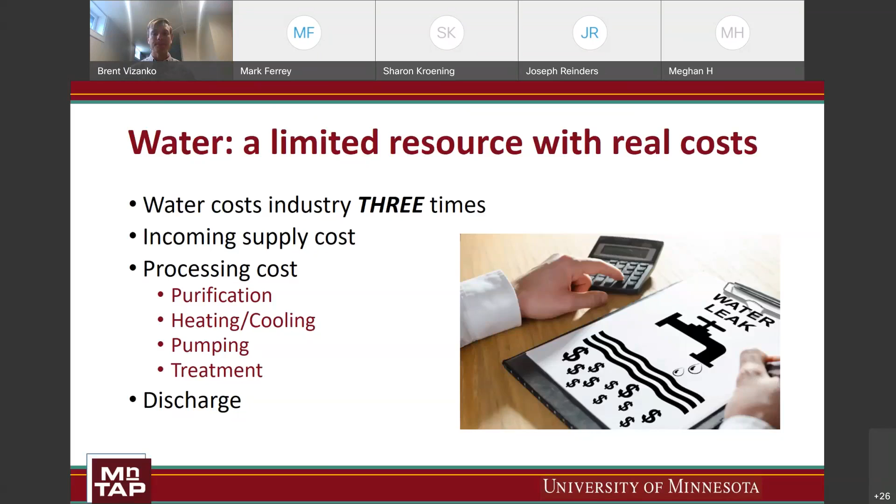Now that we know the cost of water, the next step would be to find where water is being used. Here are a couple examples - we'll go through a couple slides of examples of where we typically find water use in these industries.

First would be washing and rinsing - pots and pans here on the left, to pressure washing in the middle. We see a lot of these things around, hoses are pretty common just to wash things off and rinse things out. The photo on the right is a rinse tank, so lots of water being used there.

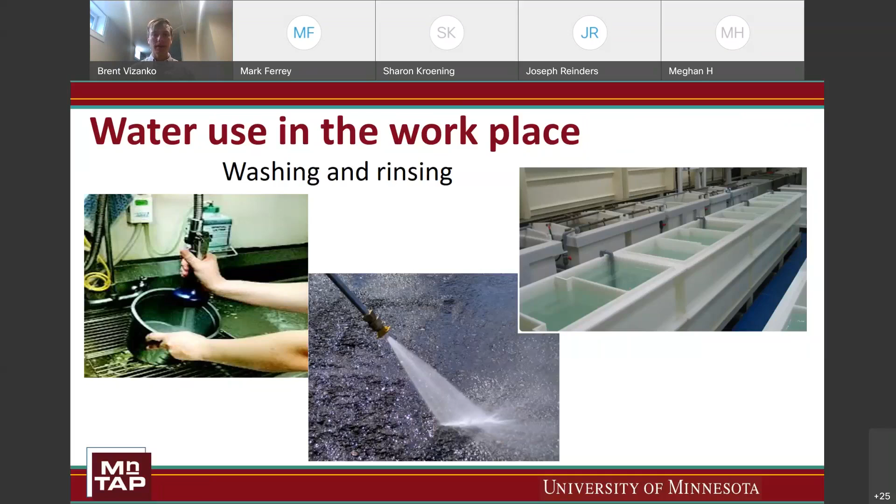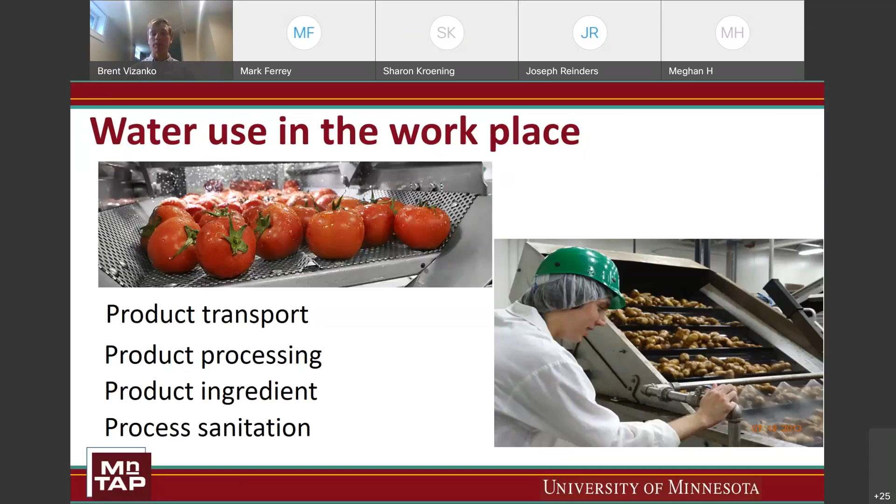These next ones are a little more specific to the food industry, but we see a lot of food facilities use water for transporting product, processing the product, as an actual ingredient in whatever they're producing. And the fourth one, sanitation, is typically a pretty big one with a pretty good opportunity usually for conservation.

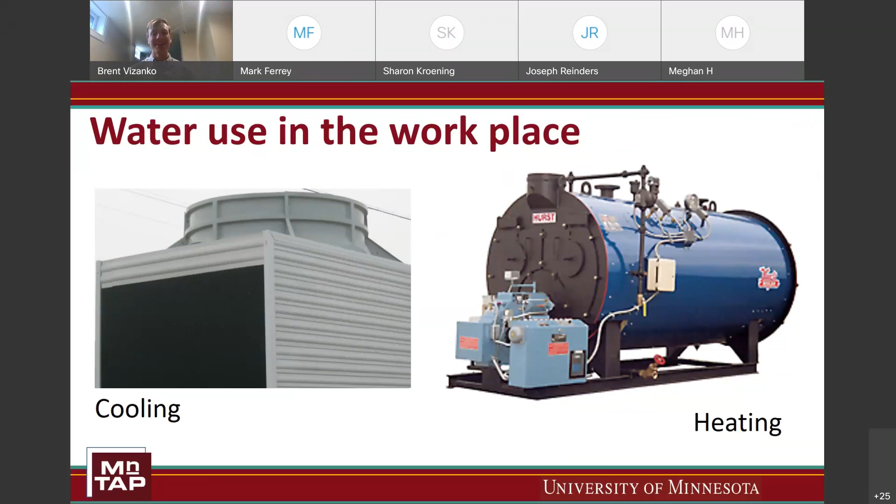The next place we usually find water would be cooling and heating. The picture on the left is a cooling tower used for cooling loops, and for heating you think of steam - steam is just water, so we find some water use there as well.

The next one is water treatment and purification. This on the right is a reverse osmosis skid. Typically water purification treatment has some sort of reject water, so that's what we're looking for when it comes to these types of processes.

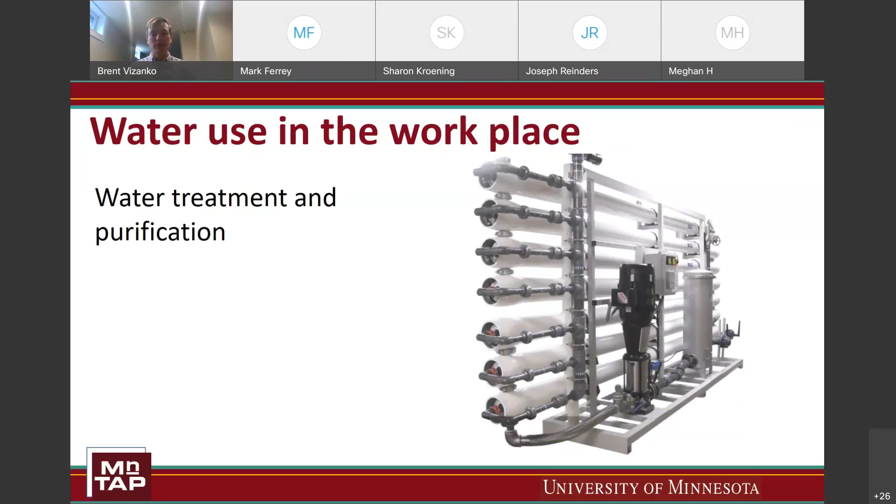Finally, landscape irrigation or domestic uses - not the typical industrial water use, but something we do see often is irrigation of land and turf, and then domestic uses like toilets, sinks, and showers.

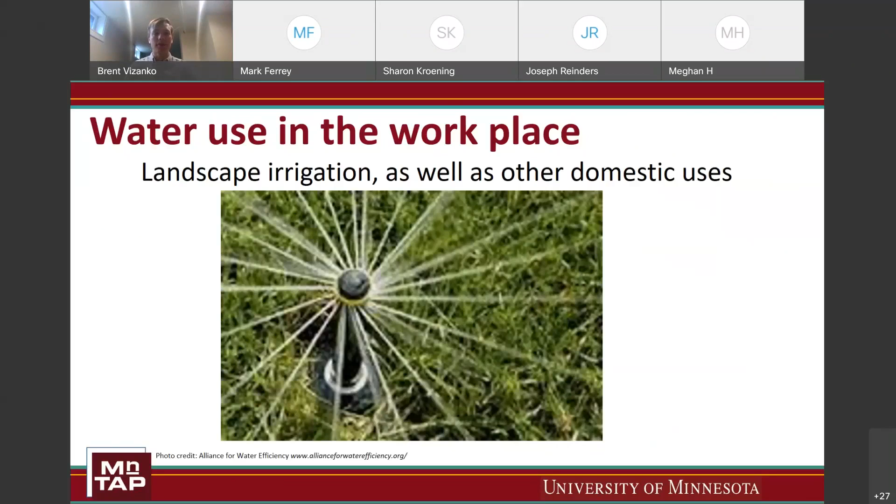All right, so now we're going to talk a little bit about how MnTAP characterizes the opportunities we seek out at these facilities. For a long time with water assistance, we were trying to think of a way to sum up how we can provide a variety of recommendations to facilities. What we came up with was a 4-part strategy, the 4 M's, if you will.

Those are map, maintain, manage, and modify. Mapping, that first stage, can really be independent of the other three. This is usually a very important step before getting to recommendations that fall under those following three categories. However, we might actually make some recommendations to a facility that help them map the water a bit better, so that they can sustain implementing these recommendations as they move forward and find new opportunities. That mapping stage is really crucial to get a picture of what your opportunities are.

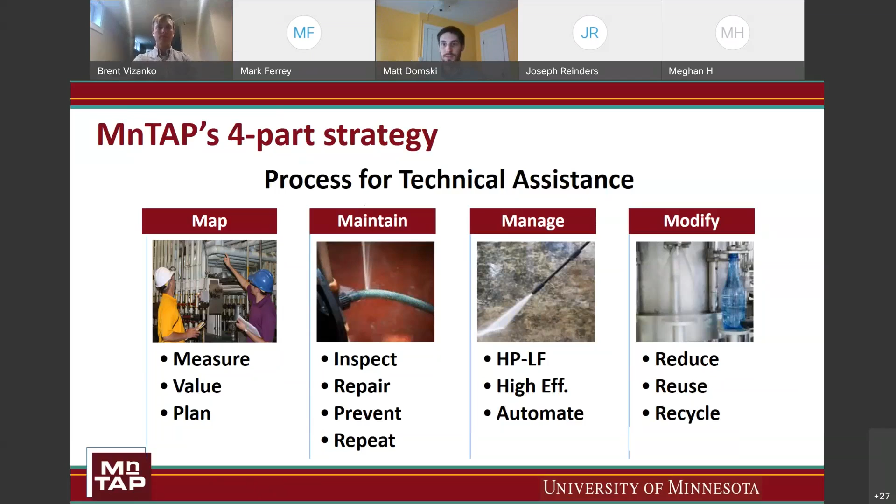So we will revisit this slide once more, and I'll give you a little more summary and context as to the importance of having this variety. But we'll get into some examples of how these come into play when we're out visiting facilities.

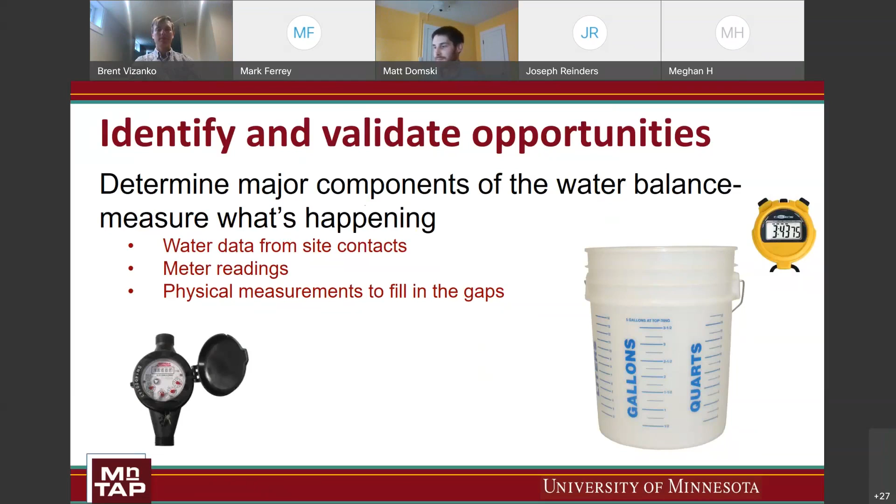Just to touch on the mapping side quickly here, this is really our chance to identify and validate opportunities for each individual site. We prefer to start either our assessments or our intern projects with a water balance, really understanding how water is moving through a facility, through a system. We do that by getting some data from our site contacts, and we might have to take some meter readings of our own. We do have some equipment where we can measure flow rates, and sometimes we may need to pull out the bucket and stopwatch to actually get some very source-accurate measurements as we go through our assessment.

So if we have a good water balance, moving on to some of these types of solutions we're looking at - leak identification and repair on the maintenance side of things. This is something you're going to find almost anywhere, in homes, commercial, industrial facilities - leaks happen. Equipment goes bad, fittings and hoses fail. The key here is really having a good system in place to identify these, repair them as quick as you can, and then repeat that process. At times we might be working with a facility to set up a good program in that regard, if they have a system prone to leaks especially.

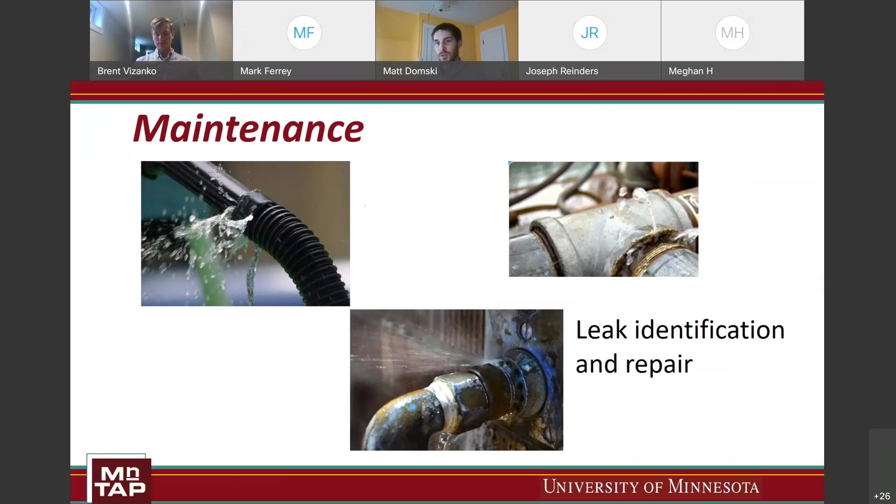On the management side of things, a lot of times we push as much as we can for water-free cleanup. For example, in a lot of food processing facilities, it's advantageous to sweep up something that hits the floor, get it into a bin before you have to hit the floor with water. It's not only a water savings, but it can really save a lot of time as well, depending on the type of product you're dealing with. Things can gum up on the floor and be a real pain to clean with just water. So no-water cleanup is definitely something we recommend.

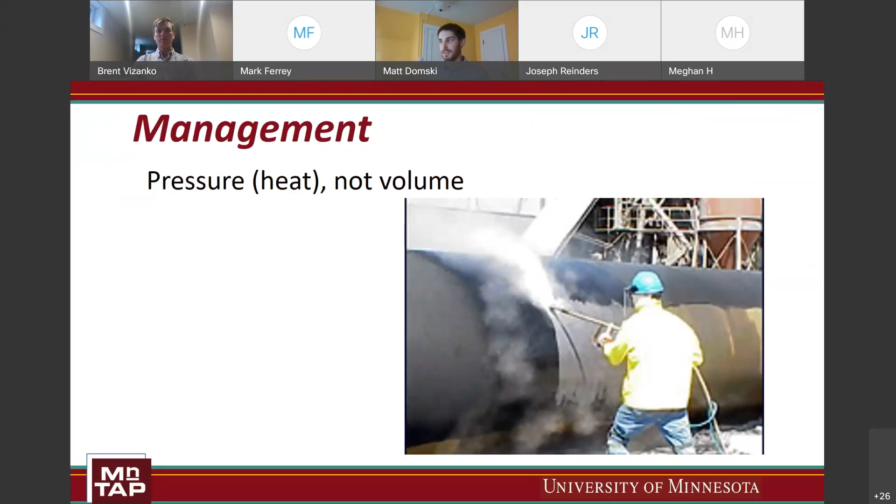On the fixture side as well, we might look to pressure washing. You can do a lot with high pressure, low volume nozzles. They're not great in all instances, and it does depend on the process, but it can be a good savings.

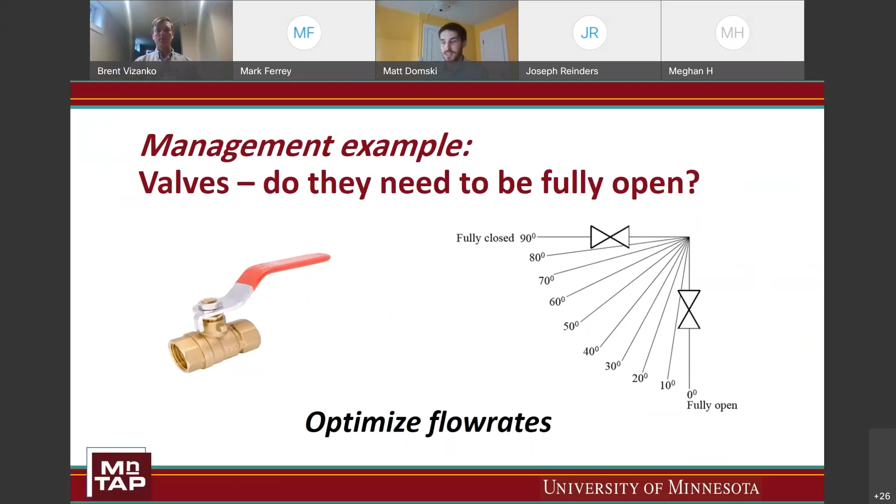And then valves. On our left we have a pretty common ball valve. What we've found in facilities is a process is often given a certain flow rate, and a valve fully open allows so much water through, but some processes really only need a little. So we've looked at mechanisms to limit those flow rates, whether it's a chart like the one on the right, something you attach to the ball valve, or sometimes mechanical stoppers that limit how much you can open the valve. The key here is there's opportunity to optimize flow rates. You need to question whether you really need the entire flow you're given for a particular process, and in many cases the answer is no.

The water needed to reach a certain temperature for compliance, and the temperature probe for this process was located at the middle of the tank. So the facility was used to just filling the tank roughly to the middle with water to trigger that temperature probe and start the cleaning process. What they found out was they didn't actually need that much water for the process, so a solution here was to change where that temperature probe was located.

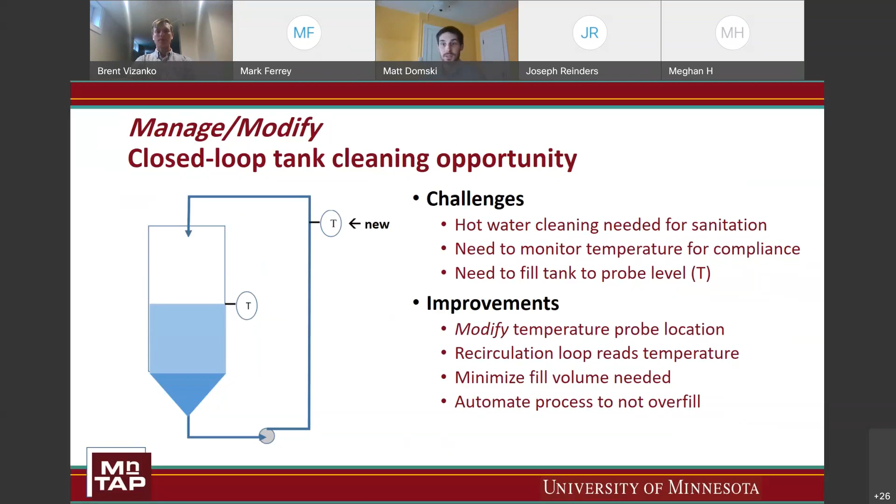They were able to install an inline probe in the piping system, and that way, if you look at the darker shaded portion of the tank, that triangular lower portion depicts essentially the amount of water that really was needed for the process. This is just an example of a way to tweak the process and change a piece of equipment to gain long-term water savings, by really identifying what we actually need to run these different processes.

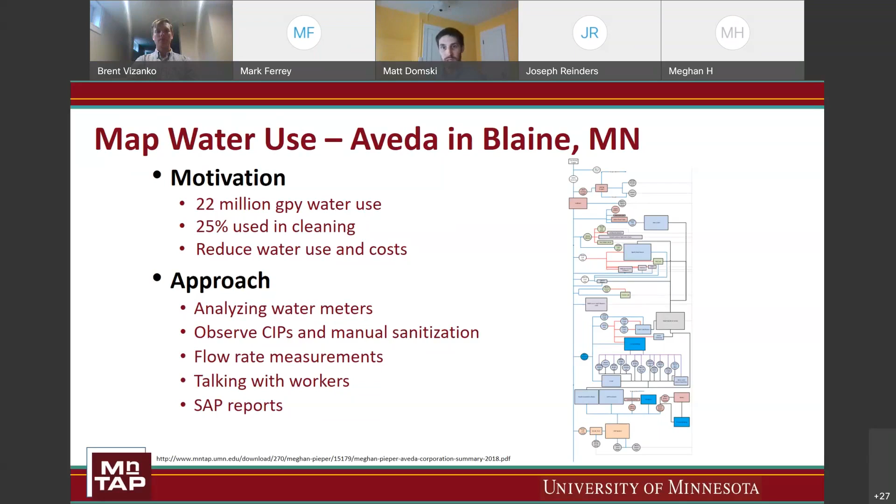Now jumping back to an example of how mapping has been useful for a facility, this is a two-part example. In the first stage, the diagram on your right is quite detailed. This was a pretty detailed water map of the facility. They're not always this detailed, but an intern did an excellent job at this. What this allowed us to do was get a broad picture of the opportunities at the site and how to prioritize them, and we were able to analyze the percentages of usage across this roughly 22 million gallon per year usage for the facility.

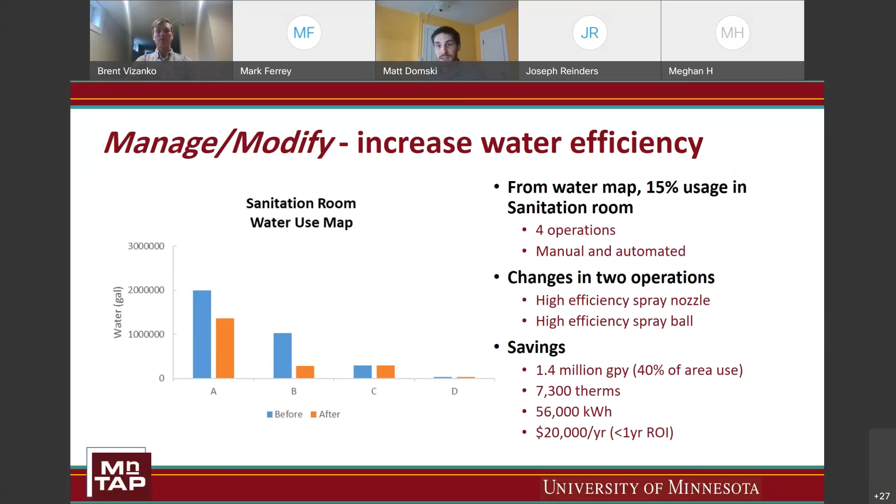That map led us into looking at a few opportunities, one of which was sanitation rooms at this facility. They had 4 different operations that accounted for about 15% of the site's total usage. Using that water map, we pinpointed a need, and the intern was able to identify solutions for those specific sanitation rooms, such as high efficiency nozzles and spray balls that wash equipment and recirculate water. This gave us some nice savings, and this was just one piece of that facility.

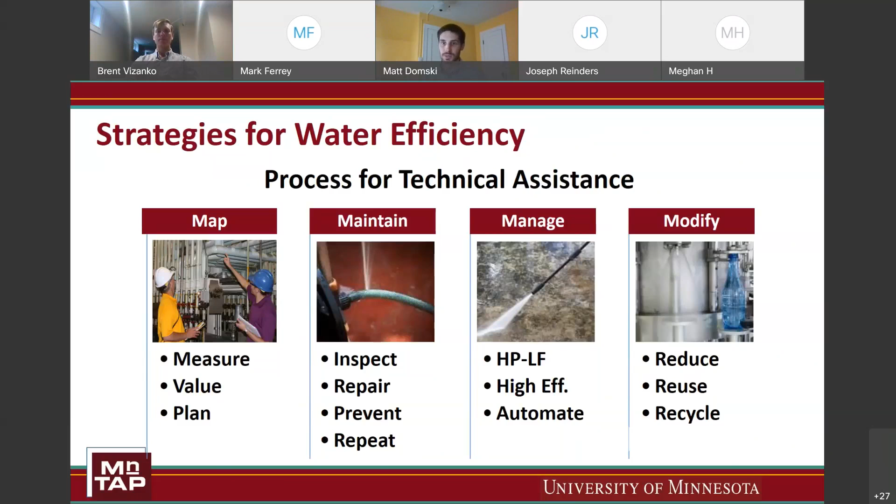Brent touched on the fact that we have two main functions: a full-time staff that does site assessments of our own, and intern projects as well. The big difference is the time we have to dedicate. We can get a lot done with our own site assessments—a half day to a full day, with a few visits over time can really help give a good plan to a facility. But three months with a full-time intern can come up with some excellent solutions. It's very helpful for us to have both of these capabilities as an organization.

Whether we're conducting this work through our assessments or through our interns, our simple process is to start by mapping and diagramming the usage. We then want to gain perspective from the facilities we're working with. When we go into sites, we don't know everything and we're not pretending to. We want to learn from them so we can help them. That's a huge piece of this—getting the right team at the facility together, understanding what's going on, and sometimes helping them identify what the solutions are.

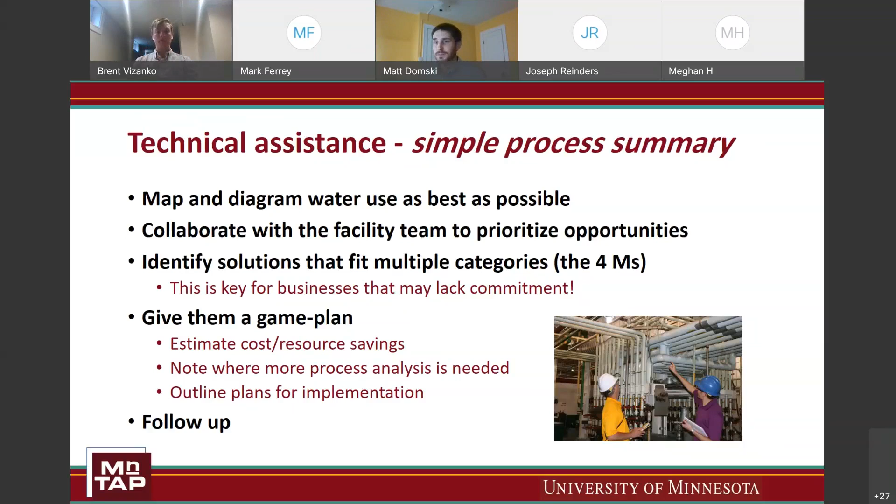Through our process, whether intern projects or assessments, we aim to have a variety of benefits in a variety of ways. The obvious benefits go to the businesses, but some of these businesses are in communities that may be water stressed or have issues with wastewater effluent. We really pay attention to how we can impact the communities as well as the individual businesses. Through our intern projects, we give interns a great chance to lead their own projects and gain firsthand experience, acting as a contract engineer or professional, having a real stake in what happens at a particular facility. We admire the work they do and the opportunities they have.